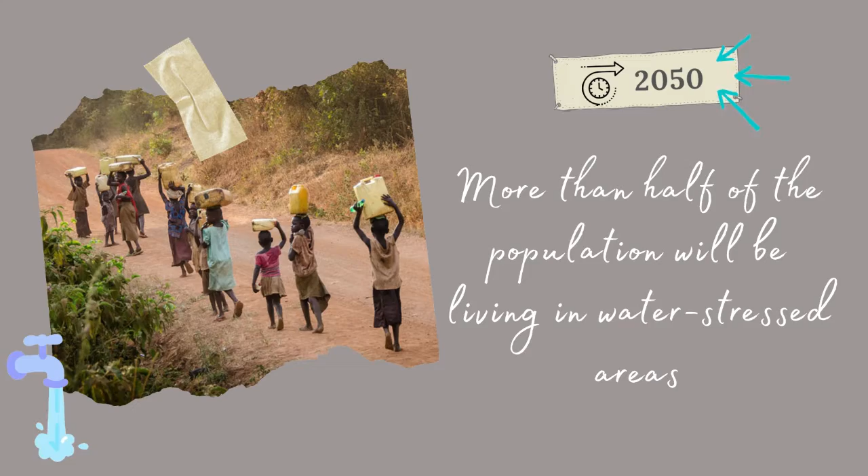Projections show that by 2050, more than half of the population will be living in water-stressed areas—that is over 4 billion people. These aren't just issues in some developing countries, something you hear about elsewhere. These are things that are usually happening in our community all the time, and due to those occurring problems, there are places where water is a huge problem.

There is no near source of clean water, and due to that, they rely on water that is mainly dirty, or worse, water that is contaminated. That's one of the results of poor and unclean water.

Good thing that our country, the Philippines, has 1,019 bodies of water according to the Environmental Management Bureau in 2019. But with the rapid increase in population, urbanization, and industrialization, the quality of Philippine waters has been reduced, especially in densely populated areas and regions of industrial and agricultural activities.

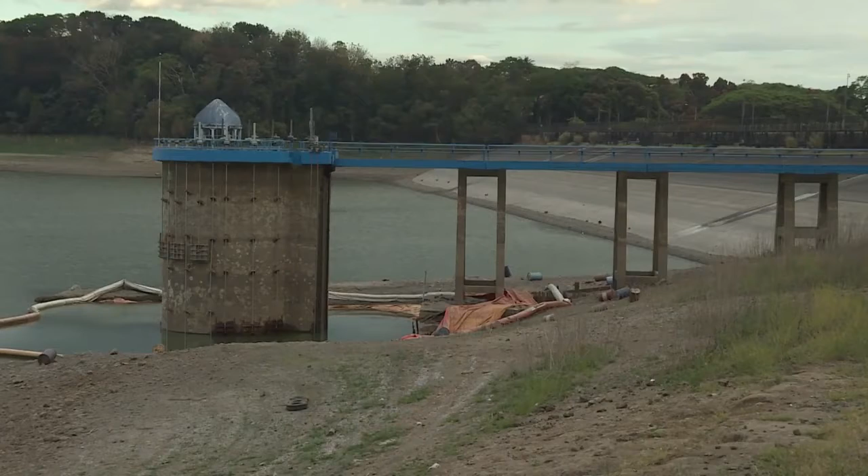The discharge of domestic and industrial wastewater and agricultural runoff has caused extensive pollution of the receiving water bodies. Access to clean and adequate water remains an acute seasonal problem in urban and coastal areas in the Philippines.

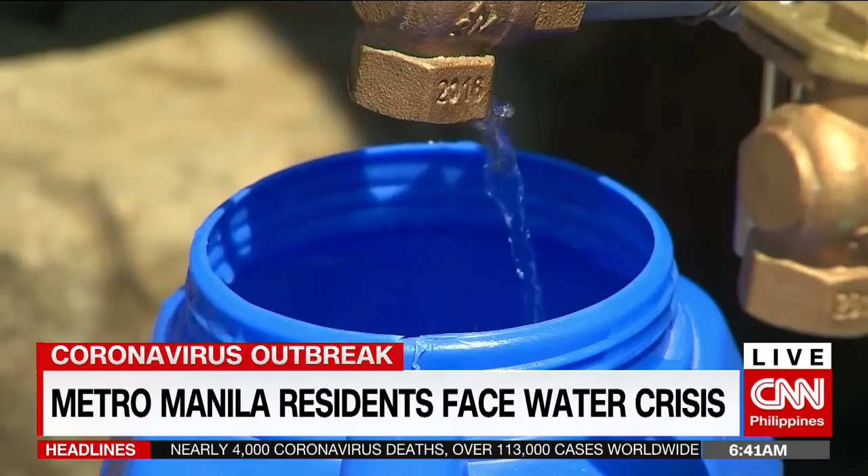The National Capital Region or Metro Manila, Central Luzon, Southern Tagalog, and Central Visayas are the four urban critical regions in terms of water supply quantity and quality. Here in Region 4A, which involves Cavite, Laguna, Batangas, Quezon, and Rizal, the main source of water supply for drinking and/or cooking was their own community water systems.

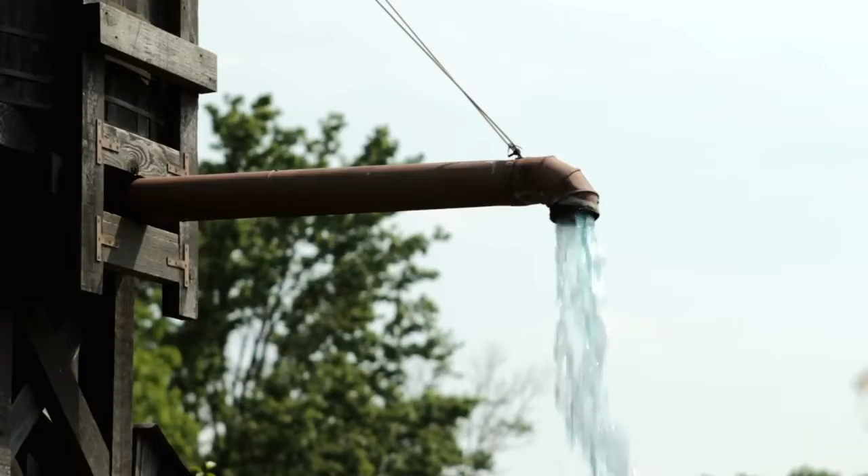Despite the fact that there are water stations that provide clean and safe water, poverty remains a huge factor as a reason for people to get their drinking water directly from the faucets, which aren't safe.

In a forum conducted by the government of Batangas and USAID, it was stated that the whole province is suffering from unsafe and unclean water due to overpopulation, urbanization, and environmental degradation.

It was also stated that different areas, especially rural ones, are suffering from water shortage because of lack of a working water system and technology that can support it. People from rural areas are enduring a limited amount of water in a limited amount of time.

One of the aforementioned areas in the forum is the municipality of San Luis, Batangas. Here, we conducted a survey of 20 respondents, and as a result, water is the major community problem in San Luis. This area is considered a 4th-class municipality which provides settlement for almost 34,000 residents.

This area can be found near Taal, Lemery, and Bauan. In description, this place can be considered partially urban, partially rural, and partially coastal because it has a sea residing in it. However, that didn't change the fact that this place still suffers from water shortage.

The salt water coming from the sea isn't potable enough for people to rely on it for their everyday lives. It is also starting to become polluted because some of the sewage systems in the area go directly to this body of water.

The S.W.A.M.P is a system which will be located above Balayan Bay, as it will serve as a source of water for the community whenever needed. It can also help to lessen the burden of high cost of water.

According to an article entitled What is Solar Energy, written in March 2021, solar energy is a type of energy which uses the sun's light and heat to generate renewable or green power, meaning not only is it unlimited but is also safe to use compared to coals, which produce carbon footprints that may lead to the depletion of the ozone layer. That is one reason why S.W.A.M.P draws power from this type of energy.

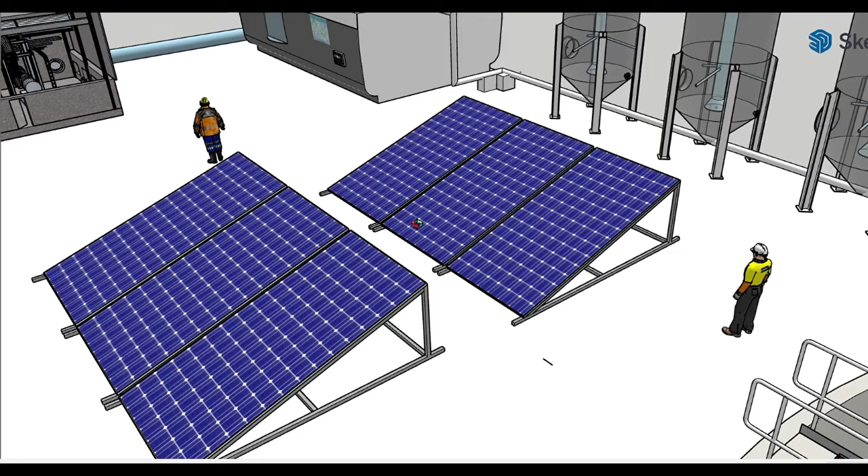Another thing is based on the geographical aspect, because the Philippines is placed almost in the equatorial belt and it experiences a tropical season, which would be an advantage for someone using solar energy. Unlike other countries with 4 seasons, the Philippines only has 2 seasons, which is also assurance for longer sunny days ahead. The machine can also function even though there is a lack of sunlight around it.

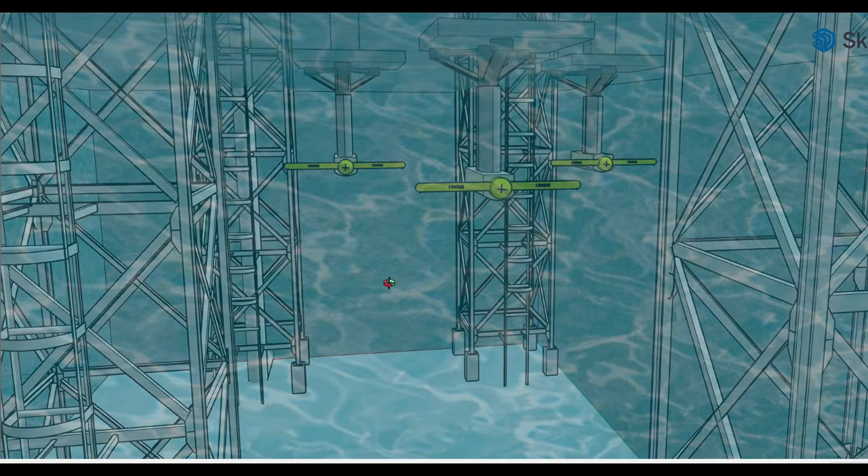S.W.A.M.P can also be powered by another sustainable and natural source of energy, which is tidal energy. According to the study provided by ARENAWire in 2017, tidal energy works via a turbine that works like a wind turbine, with blades rotating 12 to 18 times a minute, depending on the tide strength.

Our machine only uses turbines, but there are 2 methods of gathering energy with this technology, and those are turbines and paddles. The turbine is connected to a gearbox that turns the generator, creating electricity. In simple terms, it can be powered by the natural rise and fall of the ocean and tide currents. The stronger the ocean current is, the more energy provided by the machine.

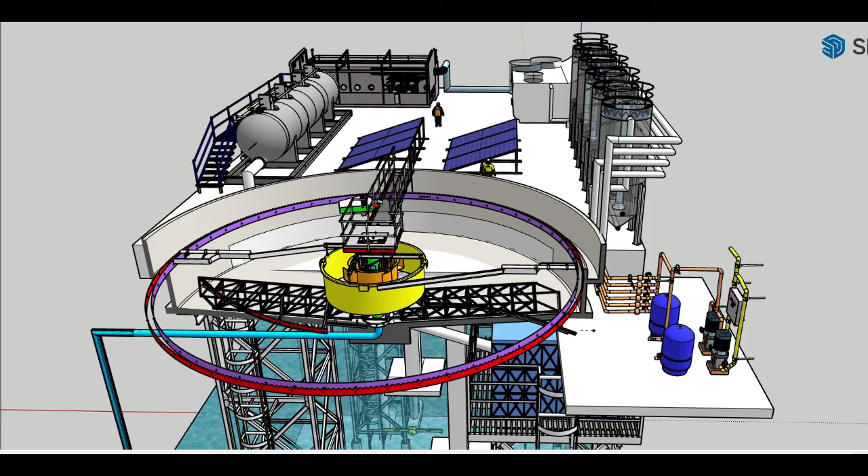Let's discuss how this whole thing works. This type of clarifier can be seen in sewage treatment, water treatment plants, mining facilities, and anywhere that has a large amount of water which needs to be treated prior to being discharged to the environment or the community.

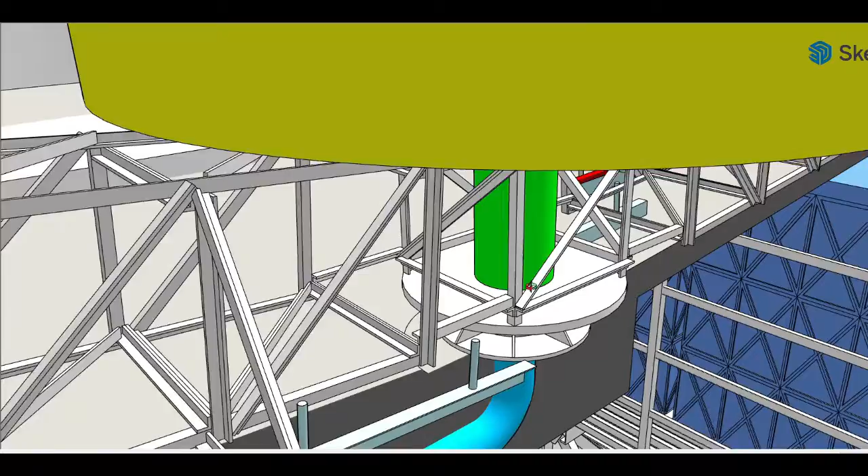The process will start when the pumping system inside the clarifier begins to pump salt water from the deep bay. At the bottom, we can see the influent, which serves as the inlet where the liquid will enter the clarifier. Inside, there will be different channels and ports, also the baffle plate known as energy dissipating inlet, through which the salt water will flow.

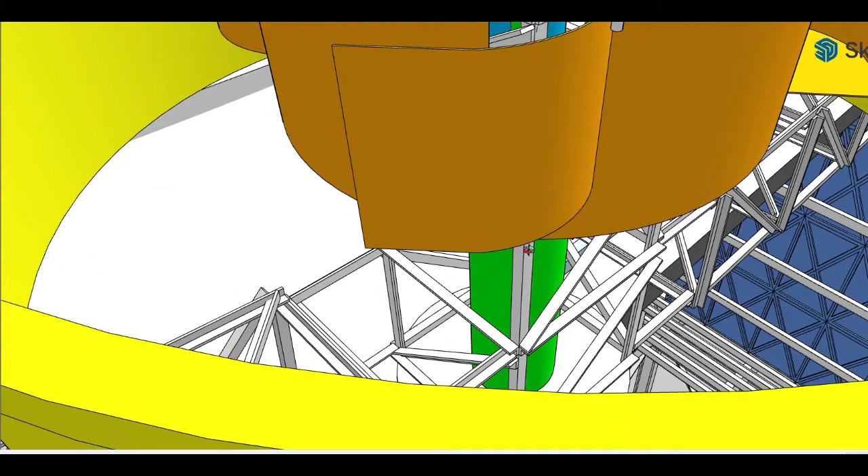Its purpose is to slow down the velocity of the water. Through this, it's going to settle a lot faster. In short, slower velocity will lead to better and quicker sedimentation to separate suspended solids from the salt water. The efficiency and capacity will be increased.

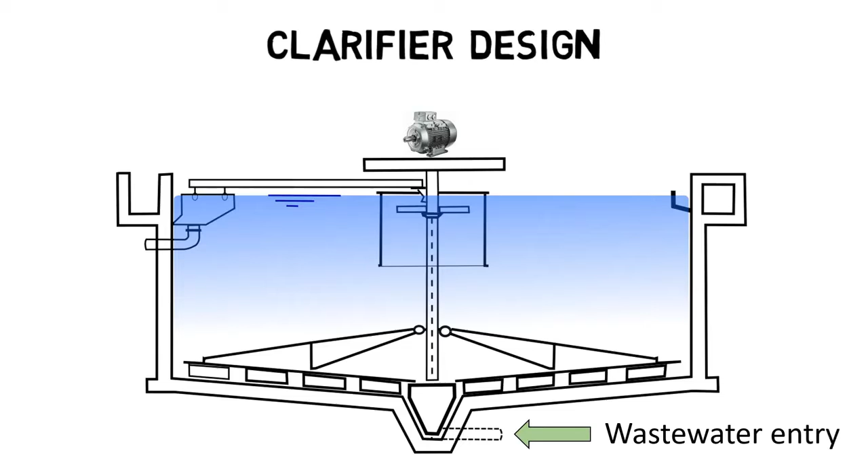After that, there will be another baffle plate. Once the velocity has been slowed down, the 3 zones in the clarifier will do the work: the inlet zone, settling zone, and finally, the outlet zone.

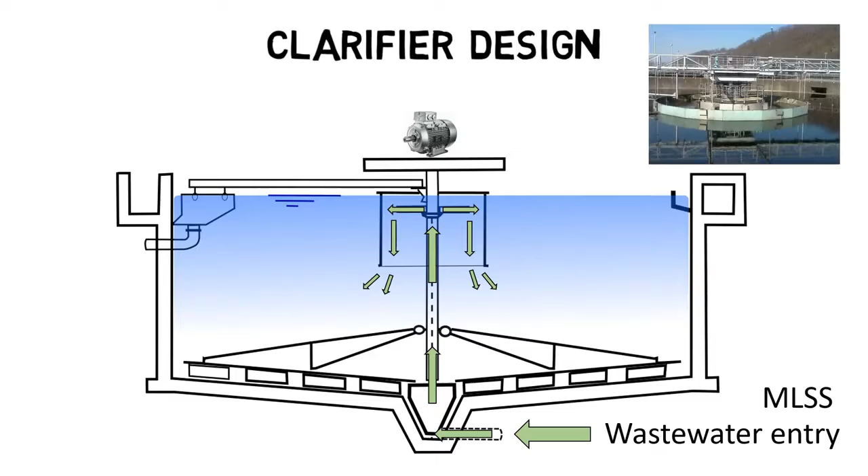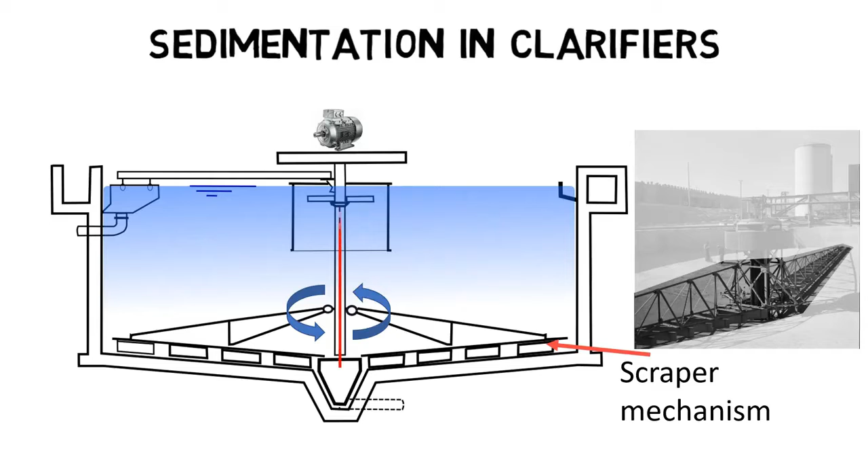However, the floatable solids will accumulate on the surface as scum. There will be a skimmer, specially built for the floatable solids. It will push the scum outwards to the outside periphery of the clarifier, and it will be discharged, leaving the water scum free.

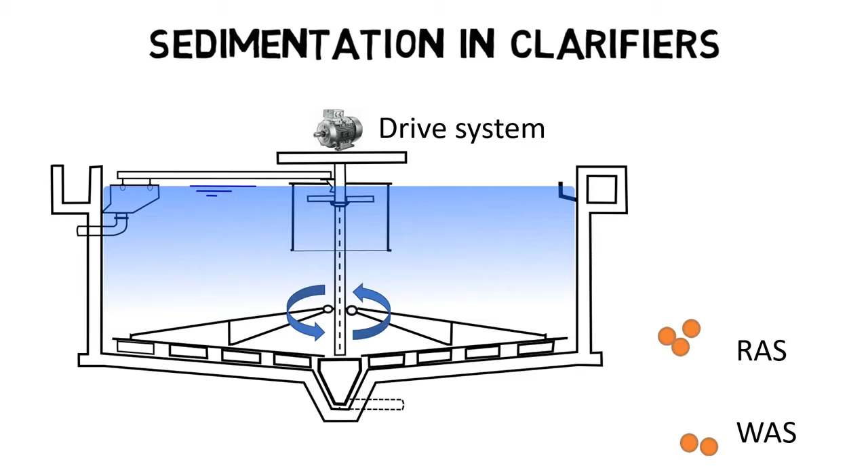In order to prevent scum from going to the clean water outlet or the effluent, there will be a scum baffle to stop it. The clean water will pass through a channel or the effluent launder until it flows out to the pipe designated for further treatment.

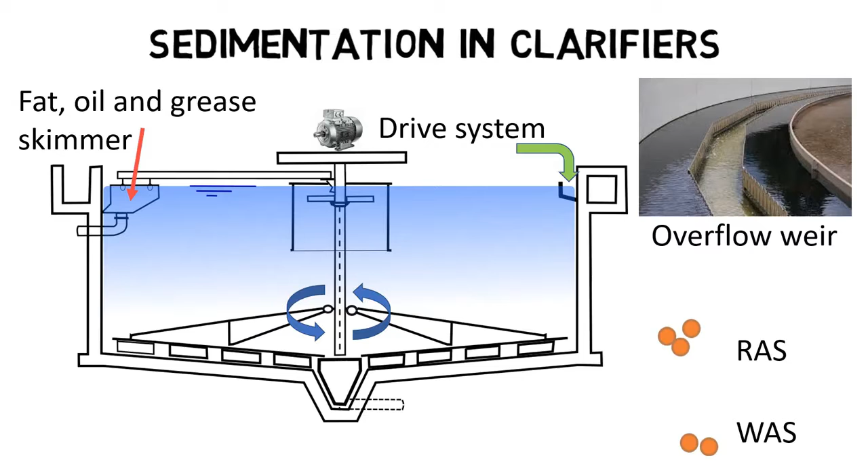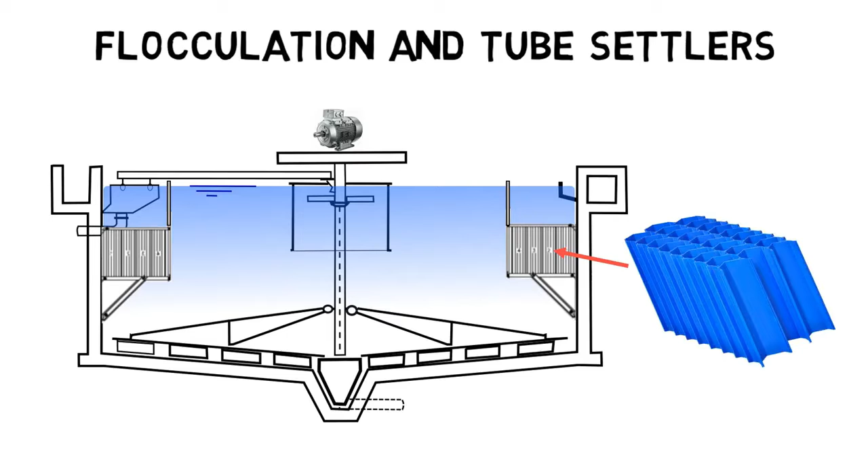The salt water that comes from the clarifier will then be pumped out through the pumping station beside it. The water will be directed to the filtration system. After undergoing clarification, the water will then be pumped into the filtration system.

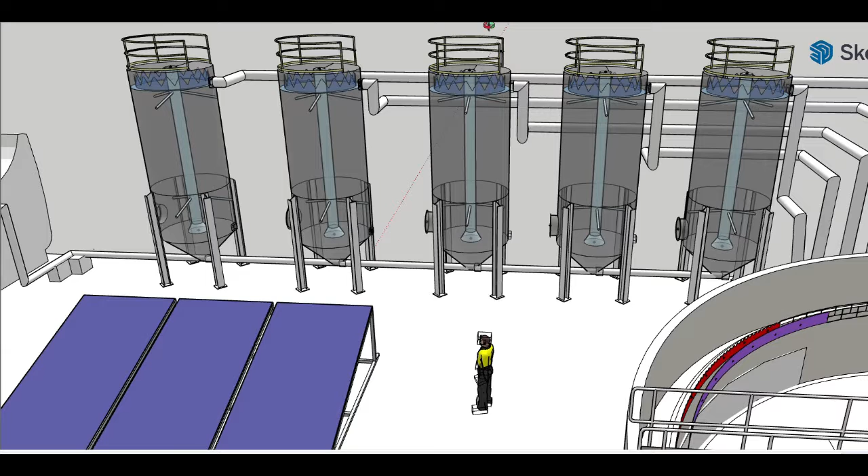Various filtering materials remove substances such as small amounts of suspended matter. As you can see, there are 5 filtering tanks present, 3 of which contain multimedia filters, while the other 2 contain activated carbon for better filtration.

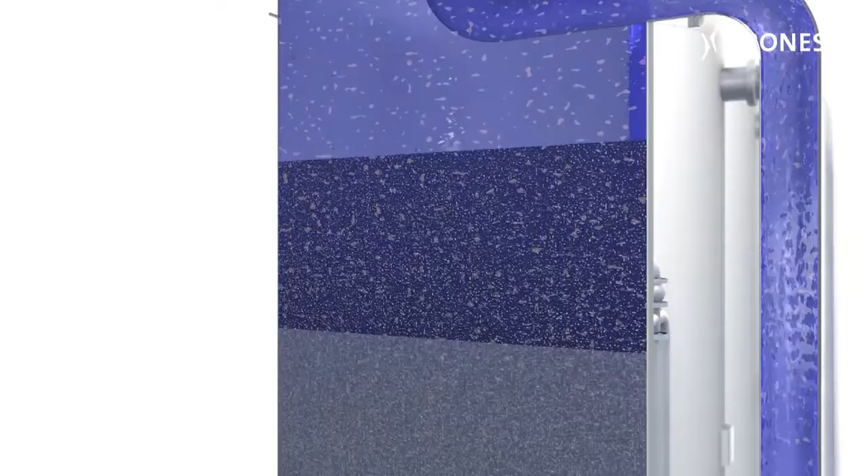The first layer in the filter is the mechanical filter media. Sand and crushed rocks will be used as they are the best type of filtration sand, since those have less chance of being contaminated with pathogens or organic material and are efficient. They are relatively compact and cost competitive for removing dissolved waste from recirculating aquaculture systems.

The second layer is a biological filter media made up of porous ceramic material known for its affordability, longevity, and powerful filtration properties. The tiny pores of the ceramic filter make it extremely efficient at removing particulate matter and fine sediment.

Also, it is a highly effective barrier to bacterial pathogens and waterborne cysts, including E. coli, Cryptosporidium, Giardia, and Salmonella.

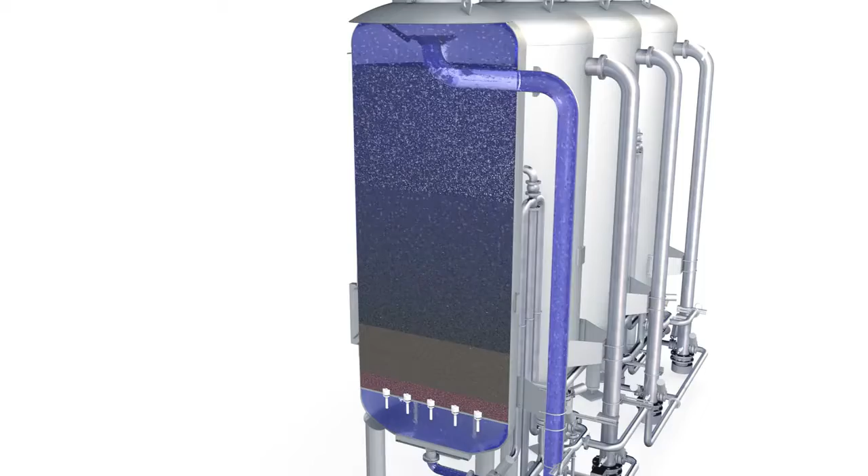The last layer is a chemical filter media containing activated carbon, as each piece has been processed to create hundreds of little pores that cannot be seen with the naked eye. These tiny holes trap pollutants such as chlorine and chloramine, dissolved proteins, water discoloration, bad smells, and more, separating them from the water column.

With this, several dissolved substances can be removed simultaneously. These filters can be efficiently cleaned and maintained using hot water.

As we may know, a simple filtration system will not remove all the contaminants and small particles of the salt water, and that is why it will undergo flocculation and coagulation processes. These are fundamental for wastewater treatment and were already used by the ancient Egyptians in 1500 BC.

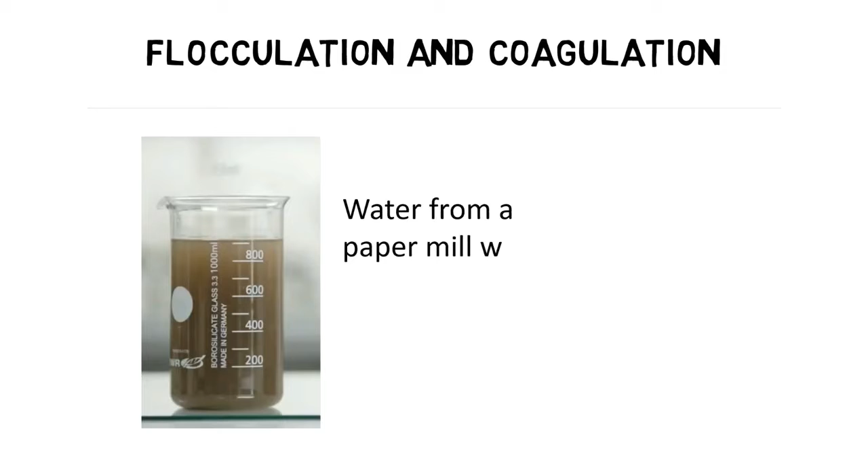The salt water may have high turbidity due to the presence of many suspended particles. Adding flocculants will cause the small particles to group or clump together to create bigger flocs, which then settle down. Turbidity of water is caused by two types of particles: organic and inorganic.

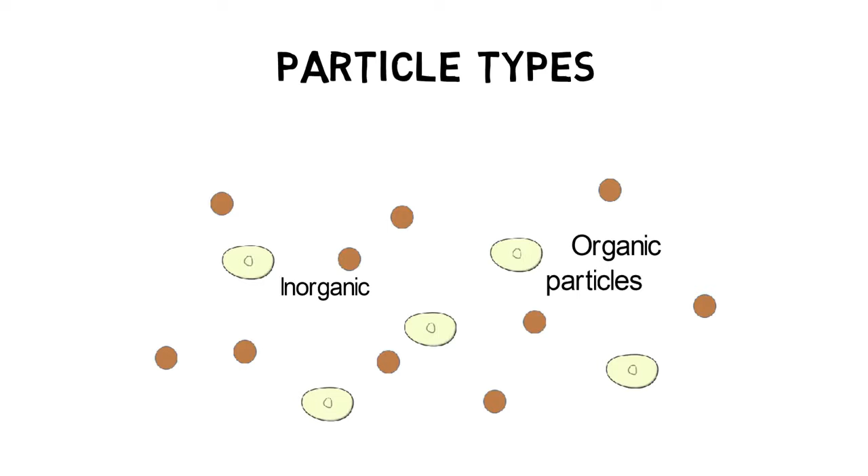Examples of organic particles are algae and bacteria, whereas inorganic particles are, for example, clay. Both particles have in common that they can float because of their small size. Suspended particles that are too light to settle down are called colloids.

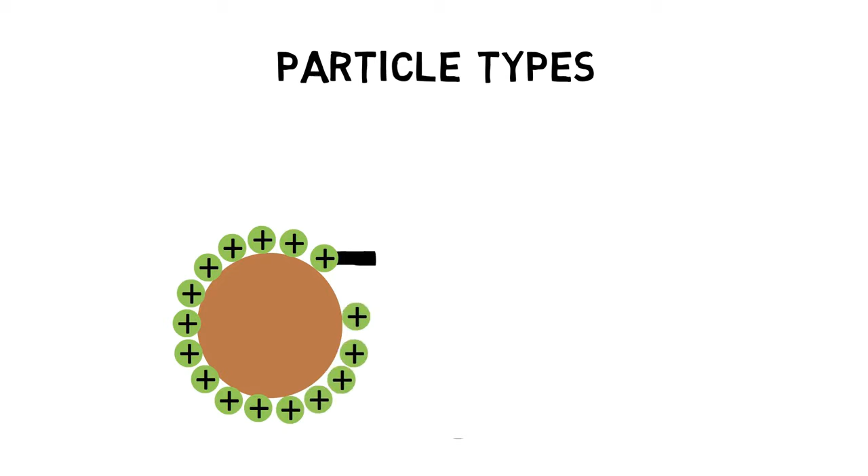Almost all colloids have negatively charged surfaces. The negatively charged surface will attract positively charged ions in the water so that the colloids form a first layer. The effect is very similar to magnets, like poles repel but opposite poles attract each other.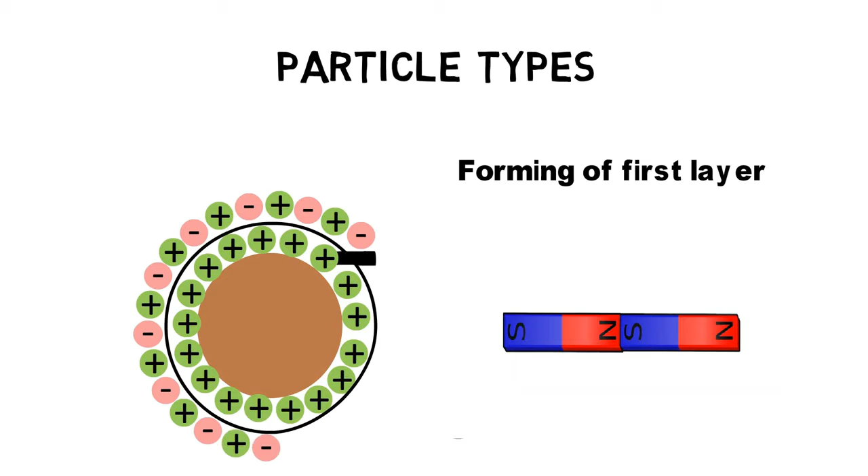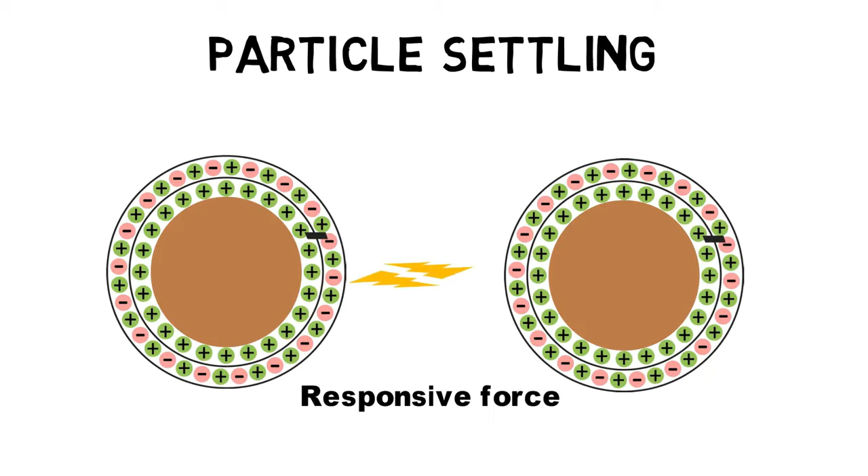Over time, colloids form a second diffused layer with positively and negatively charged ions, called a double layer. The double layer creates a repulsive force which prevents two colloids from sticking to each other. The colloids stay suspended in the water and move around to avoid collision with other colloids.

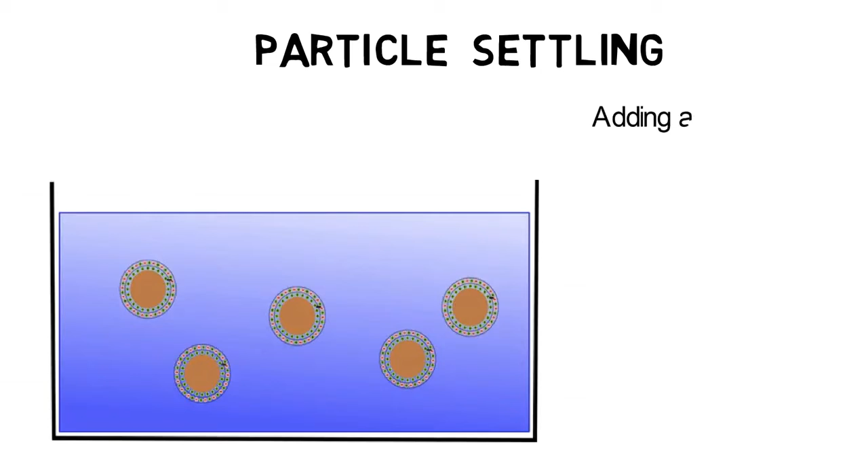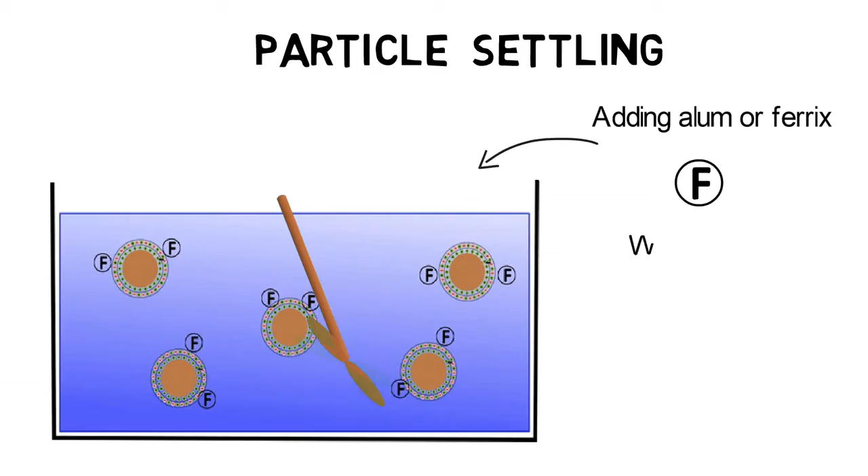To overcome this behavior and clump colloids together for particle settling, flocculants such as alum and ferrix are typically used, as they are ideal flocculants because they form a high number of ions when they get in contact with water. These ions bind together with the colloids and neutralize the repulsive forces, allowing the colloids to stick together to form bigger flocs and settle down to the tank bottom within wastewater treatment plants.

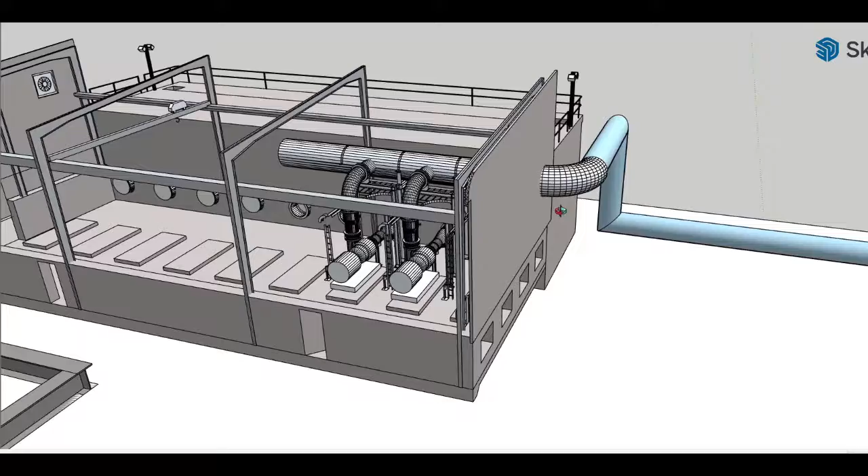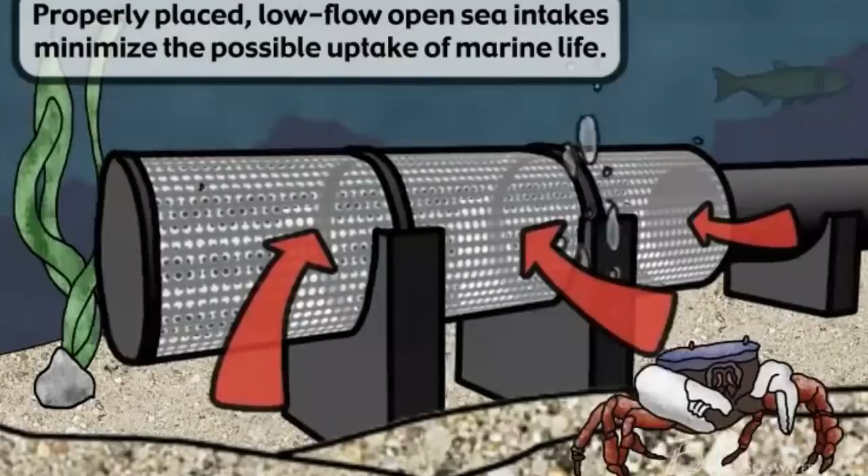This barrier, or membrane, allows some things to pass through it but not others. In nature, the direction of flow through the membrane is from a less concentrated solution, such as fresh water, to a more concentrated solution, such as seawater, until equilibrium is reached.

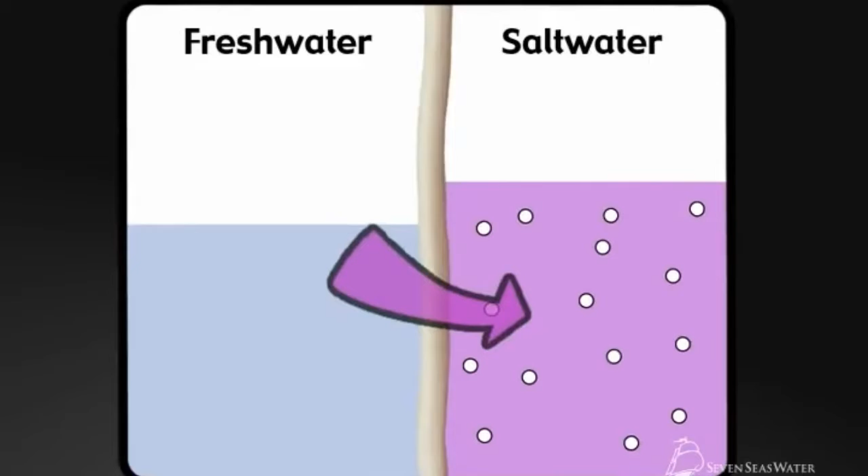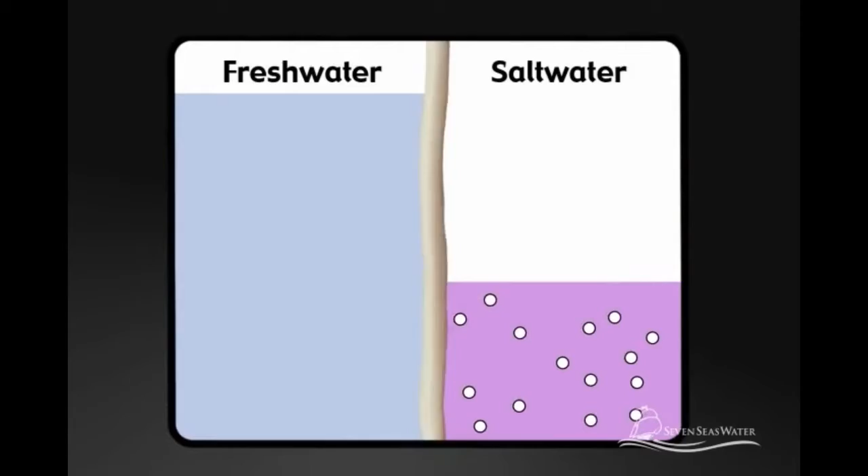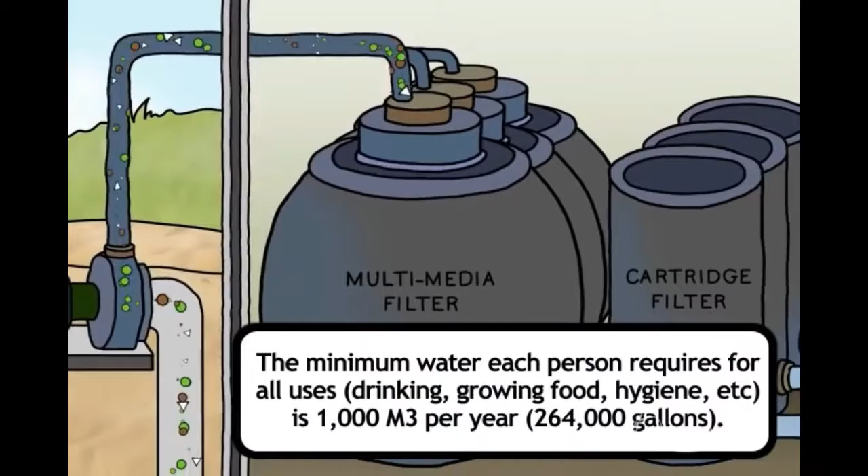Cartridge filters are typically made from yarn-like synthetic materials wound into cartridges. These remove even smaller solid particles from the seawater.

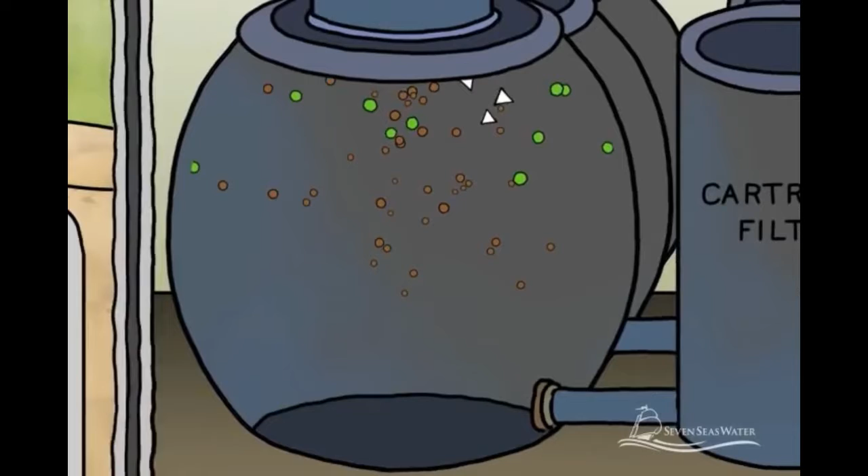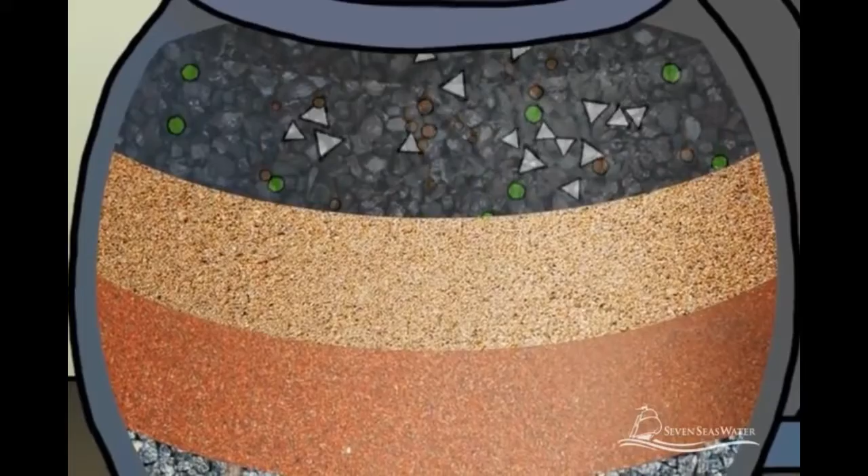High pressure pumps increase the pressure of the seawater up to 1,000 pounds per square inch. The pressure needs to be sufficiently high to overcome the naturally occurring pressure and force the water from the saltwater side through the reverse osmosis membranes to the fresh water side.

The saltwater particles in the seawater are rejected from passing through the membrane to the freshwater side and remain behind on the concentrated saltwater side.

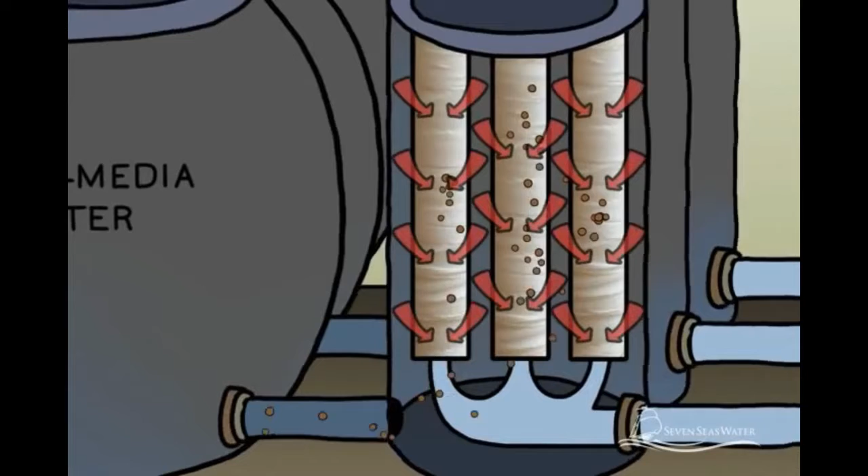The reverse osmosis membrane can be thought of as a number of sealed envelopes connected on their open ends to a tube. There are spacers between each envelope which allow water to flow across the membranes, and the membranes, envelopes, and spacers are then wound around the tube.

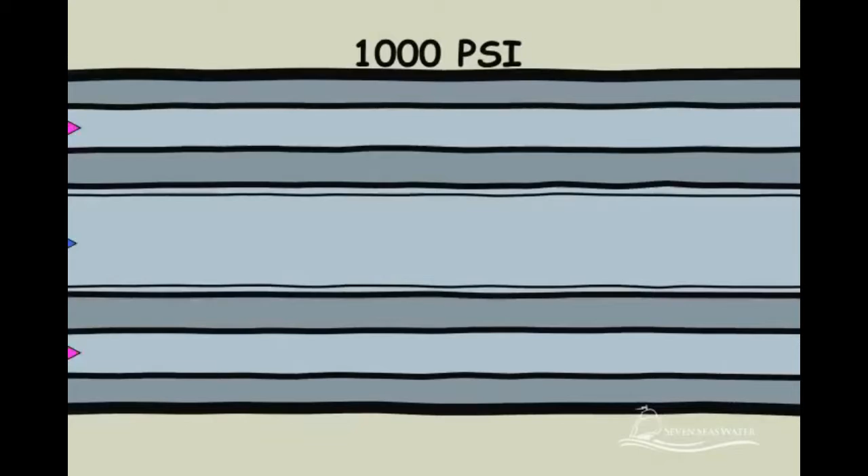Reverse osmosis membranes are enclosed in a fiberglass shell and the membranes are connected end to end, usually 6 to 7 membranes together, and housed in vessels that are built to withstand pressures up to 1,200 psi.

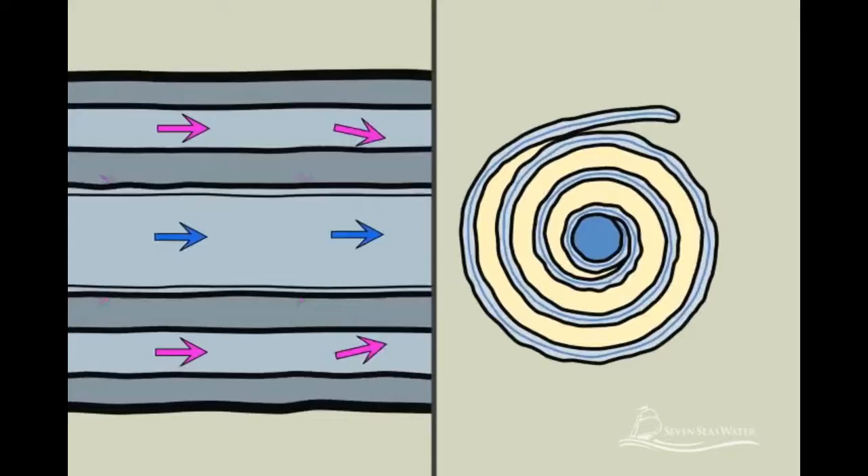As the water enters the pressure vessel and flows across the membrane surface, the water molecules are forced into and through the membrane, leaving the salt molecules behind.

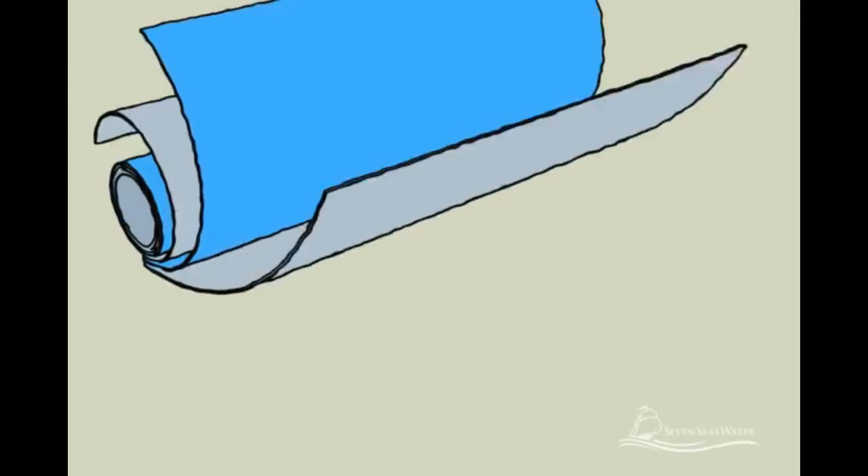The fresh water passes through the membrane and emerges at a low pressure where it is collected in a tube and directed to one end of the pressure vessels.

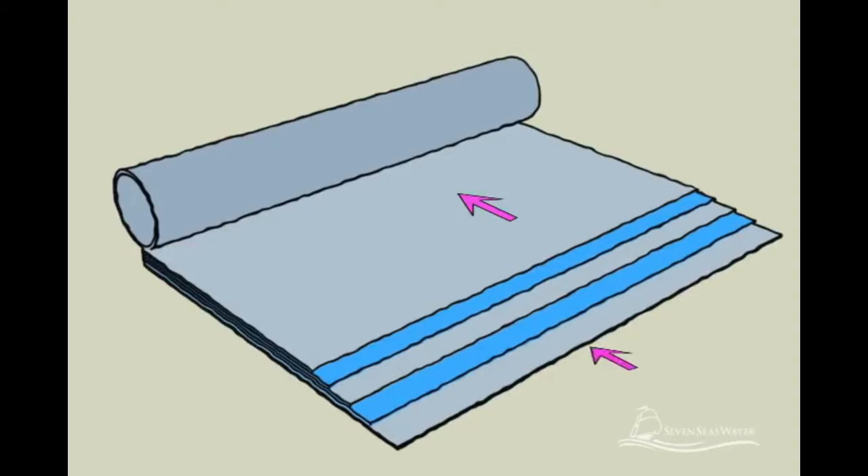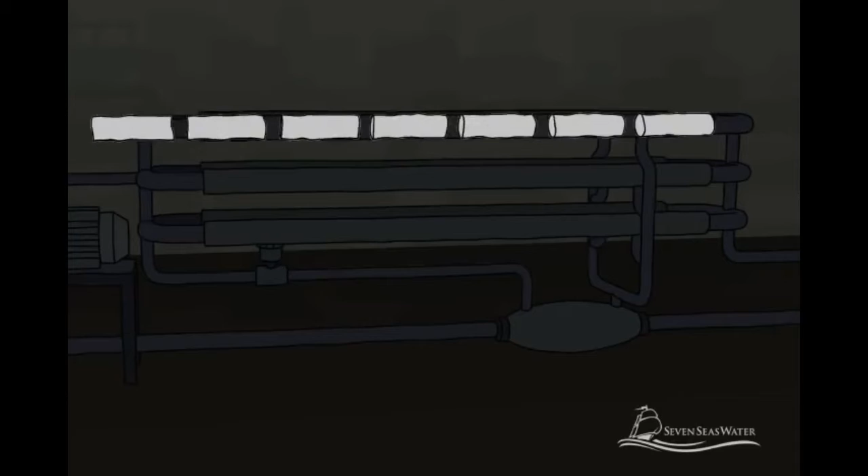The concentrated salt stream, which is rejected from flowing through the membrane, continues to pass across the membrane surface where it is collected separately. The stream is transferred to an equal volume of incoming seawater in an isobaric energy recovery device. The energy recovery device significantly reduces the plant's operating cost by recovering the concentrated salt stream's energy and using it to pressurize 60% of the seawater that is fed to the membranes.

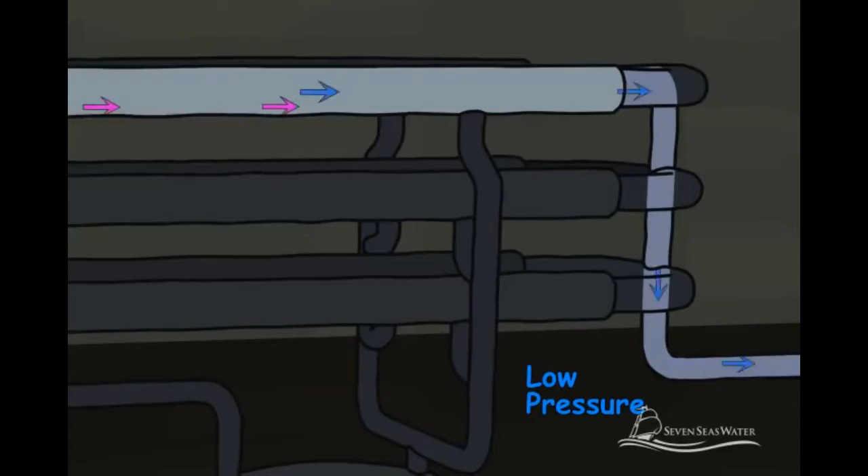The pressurized seawater leaving the energy recovery device has its pressure boosted by a small booster pump so that it is at the same pressure as the seawater leaving the high pressure pump. The boost is necessary as some pressure has been lost as the stream travels through the reverse osmosis system.

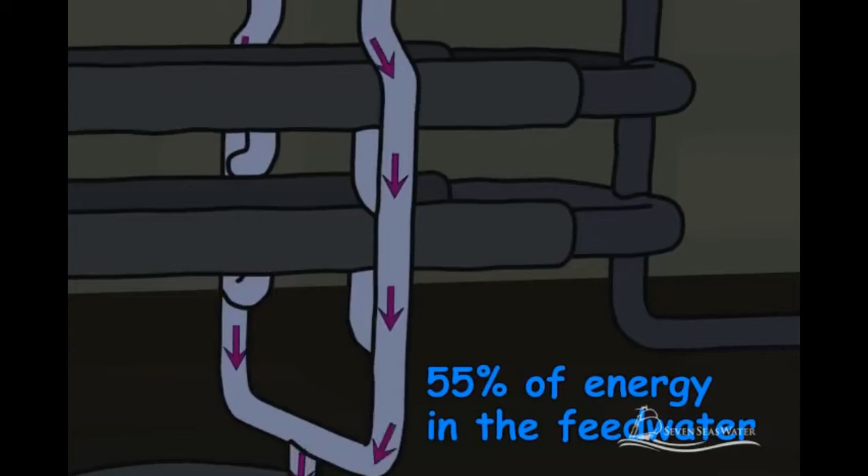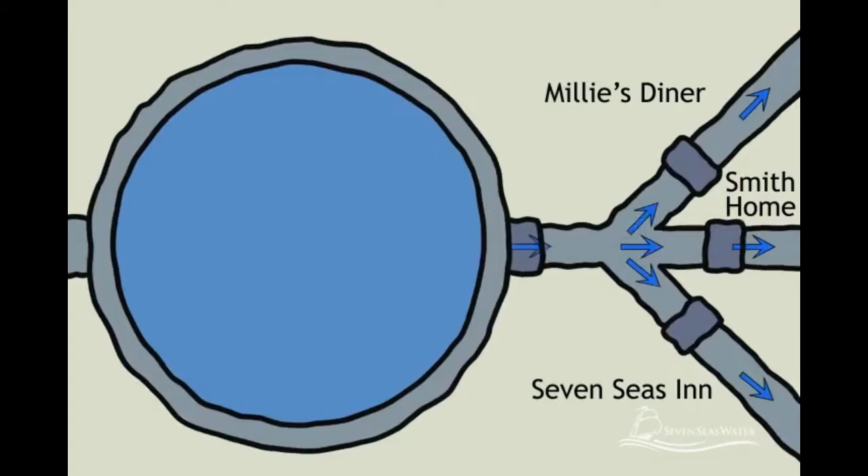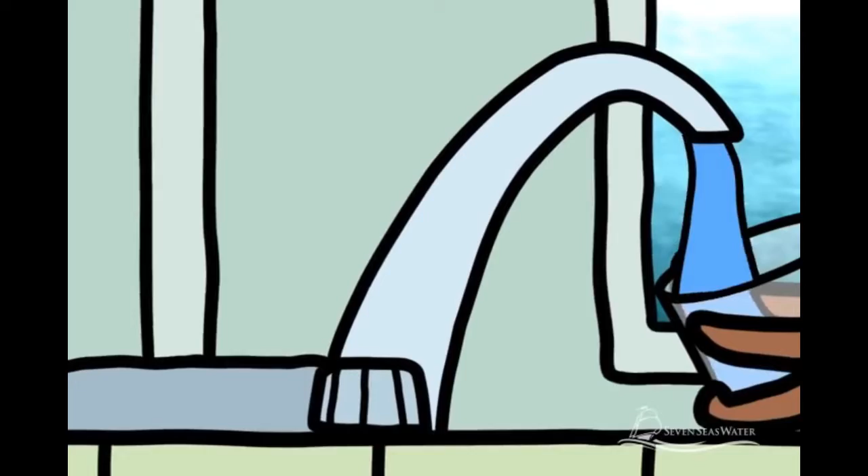When proper conservation of natural water resources is practiced, water reuse has been applied and the water deficit still remains, seawater reverse osmosis can offer a sustainable alternative with good stewardship. It can provide life-sustaining water for coastal communities, and desalted water supplies, which are not susceptible to drought and other natural disasters, can provide a clean, safe, potable water supply.

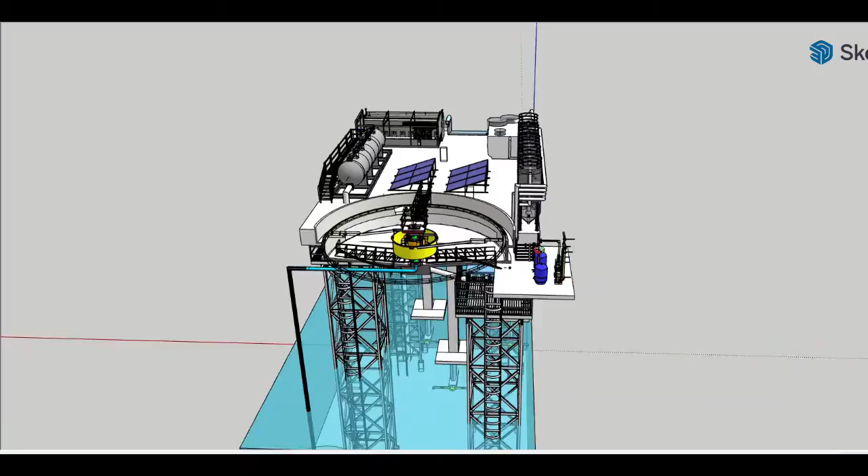Water shortage is still one of the biggest problems that we encounter in today's society, which is ironic considering three-fourths of the world's surface contains water. However, as time passes by, technology continues to rise, and the knowledge we acquire is very important in these types of situations. The team believes that the maximization of our natural resources will help a lot in solving the problems we encounter today.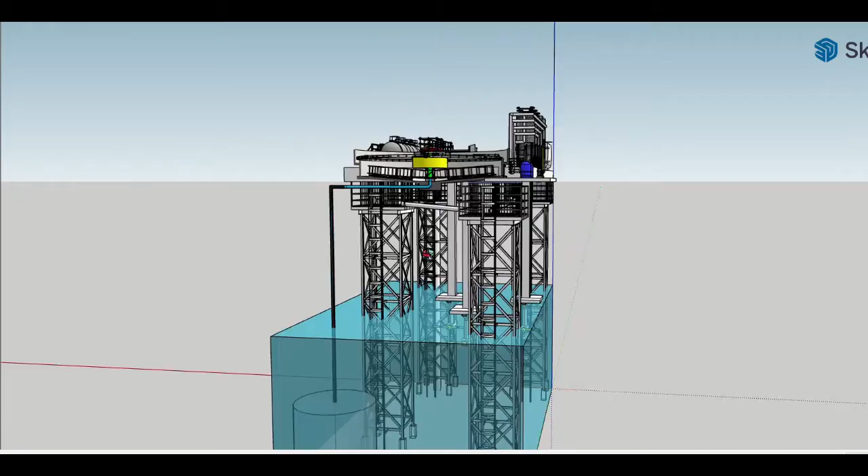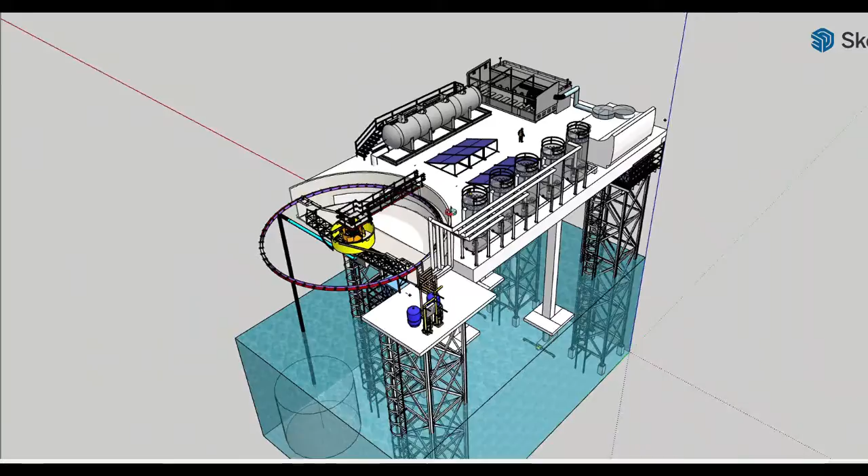In our case, we should convert seawater to potable and clean water for society to use. That is why Project S.W.A.M.P was put into action, which follows a set of processes and is made up of advanced technology which would not only help the people who need it, but also help the world that needs it more.